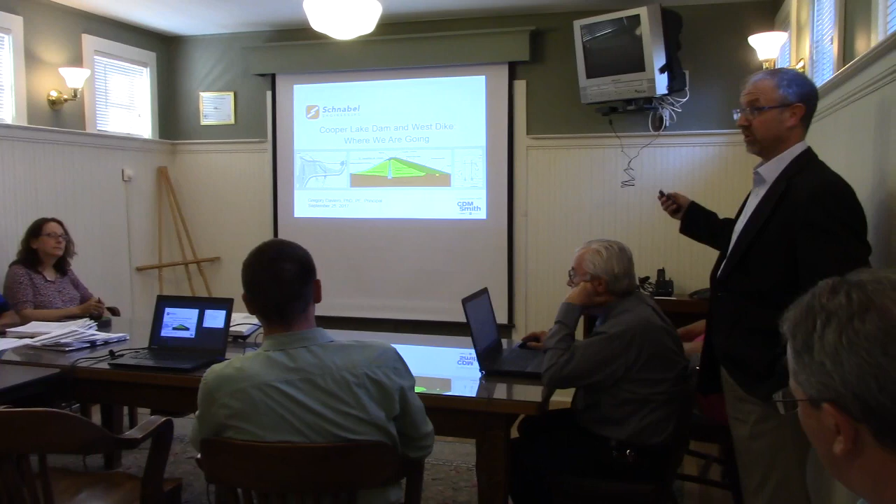Hi, thanks for everybody coming. I'm here to chat about really nothing new in this presentation. It's really an update to try to come to a decision point on how to move forward at the dam. So what I'm going to be talking about today are the drivers as to why we need to do this project. Then there are a few options, one calling the baseline project. There are two potential projects to raise the dam. And then we have a formal recommendation, and then a little bit of discussion about how to move forward.

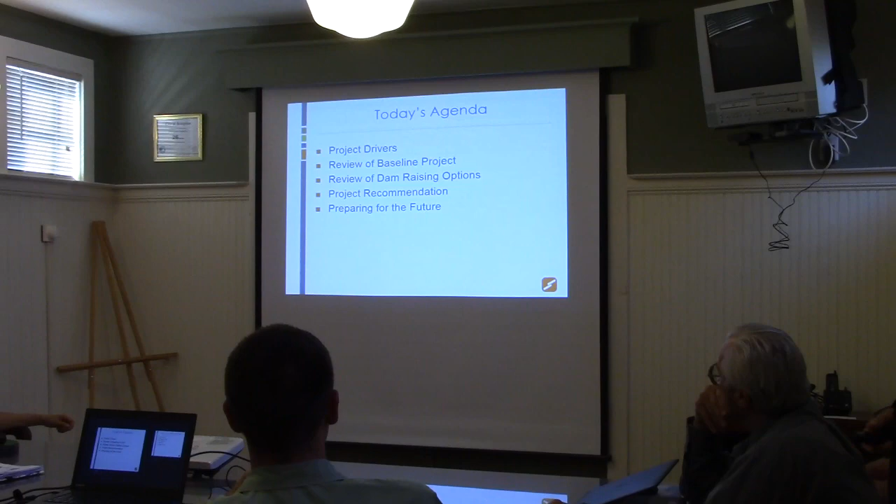So I said there's nothing new. What you're going to see here are slides that have already been presented in some way or another to the board and in other public meetings through August. My first presentation, I guess, was August 2012. My latest was January of 2016. And really, each time there was just a progression of work. We learned more, we refined the recommendation, until finally, in the April timeframe, we were pretty much where we are today, just stewing over what to do.

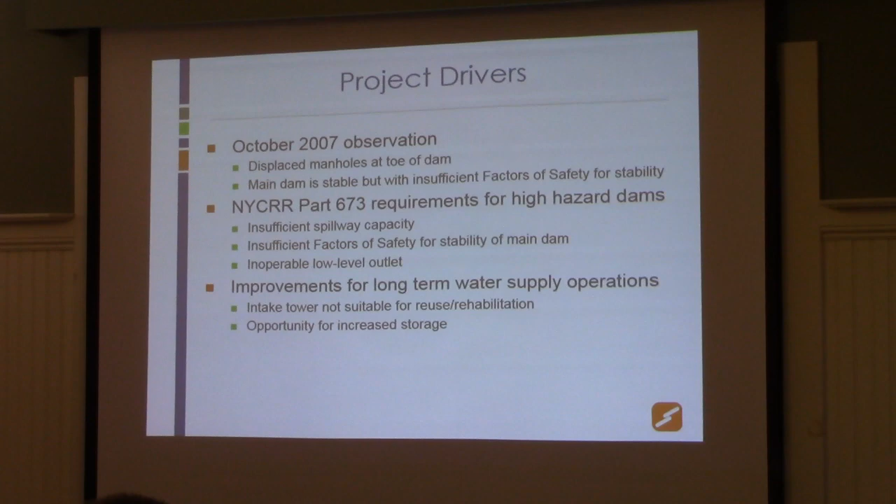So why are we here? Back in 2007, there was an observation at the toe of the dam where there was a manhole. A valve was going to be replaced, the manhole was pulled, and the top of the manhole was slightly shifted, which caused some concern because the manhole was at the toe of the dam. So there was some initial evaluations and site visits and calculations done, and it was determined that the dam was stable, but it didn't meet the factors of safety that are recommended by New York State and the Army Corps of Engineers.

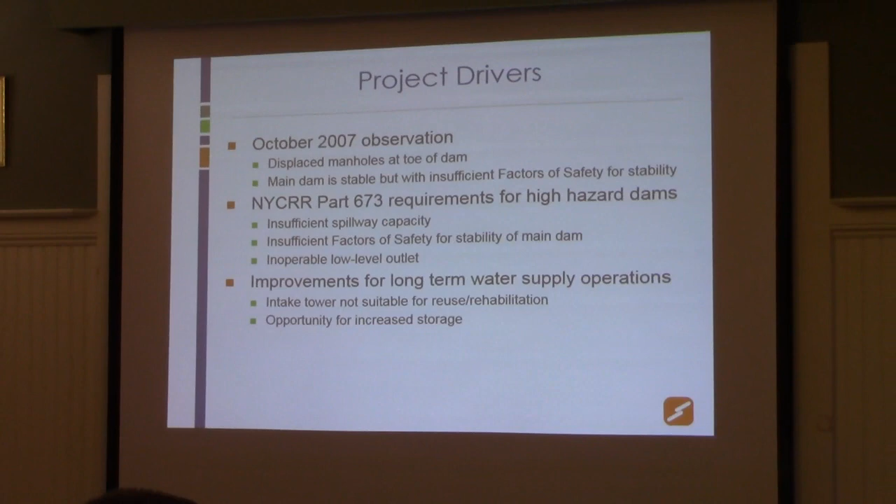Two years later, the state of New York passed new dam safety laws, specifically targeting owners of dams that are high hazard or significant hazard. This is a high hazard dam. What a high hazard dam is, is one where it's imagined if the dam were to fail, regardless of the dam's condition—it could be brand new or it could be very old and decrepit—does anyone die? Is anyone likely to die? So the answer here is yes, people are likely to die. There's communities downstream. It's a high hazard dam.

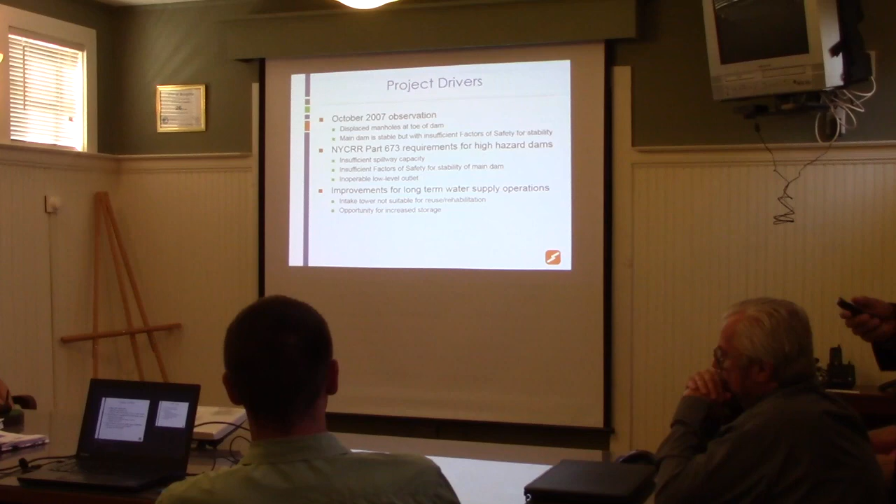As an owner of a high hazard dam, the new law requires you to perform an engineering assessment of the dam, which essentially has you look at three different things. Is the spillway of the dam sufficiently large enough to pass the probable maximum flood? An enormous storm, Noah's Ark type storm.

In years past, no one could comprehend what that meant when I stood in these presentations. Now people understand—Irma. When Irma arrives in Kingston, our spillway has to be capable of passing it so the dam doesn't overtop and fail. So that might not be an exact comparison, but you get the idea.

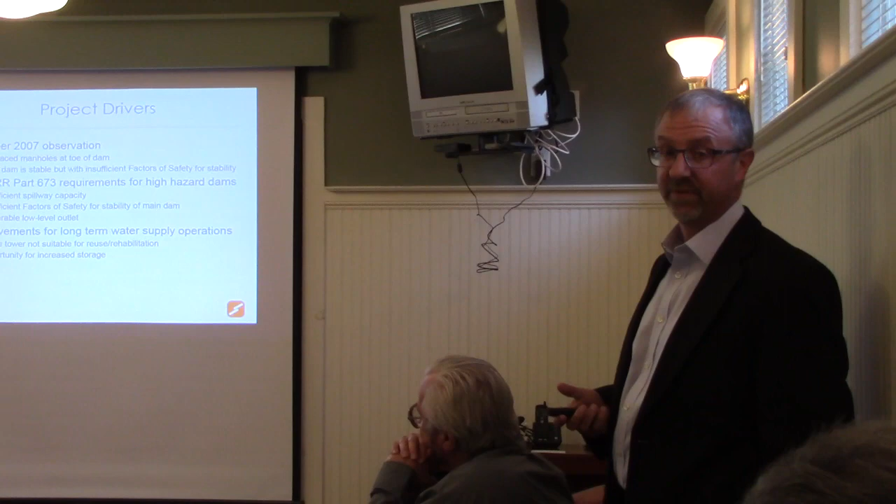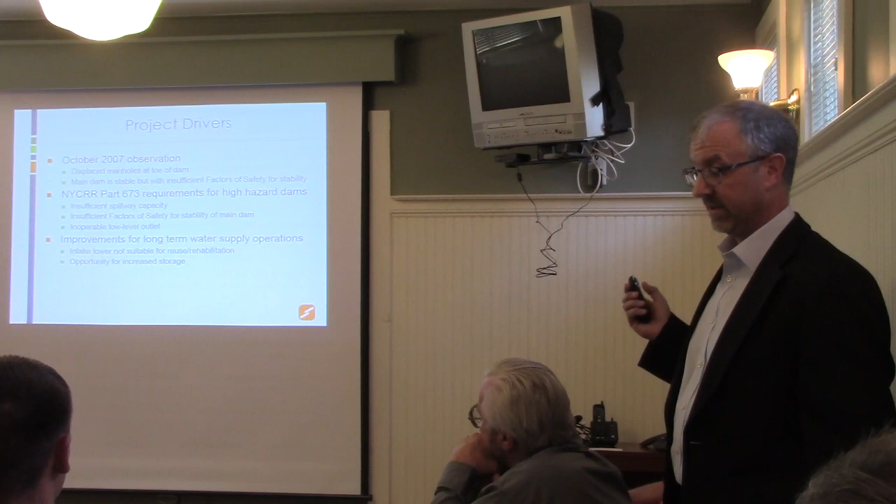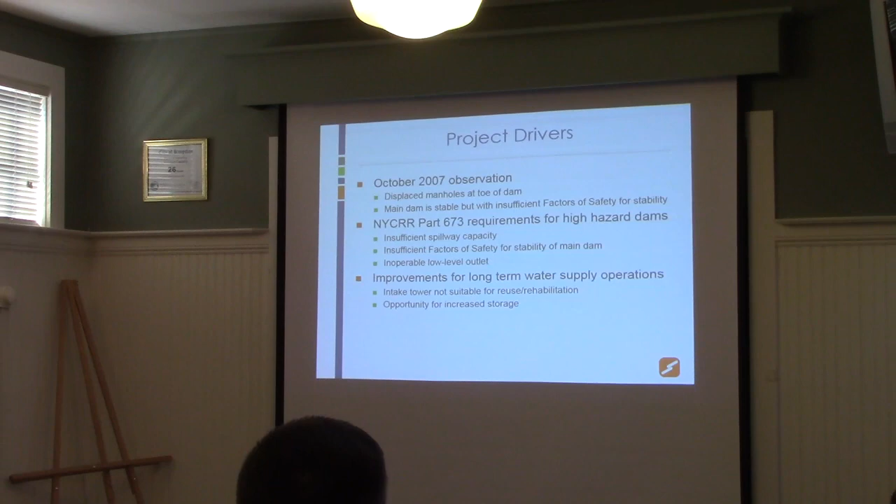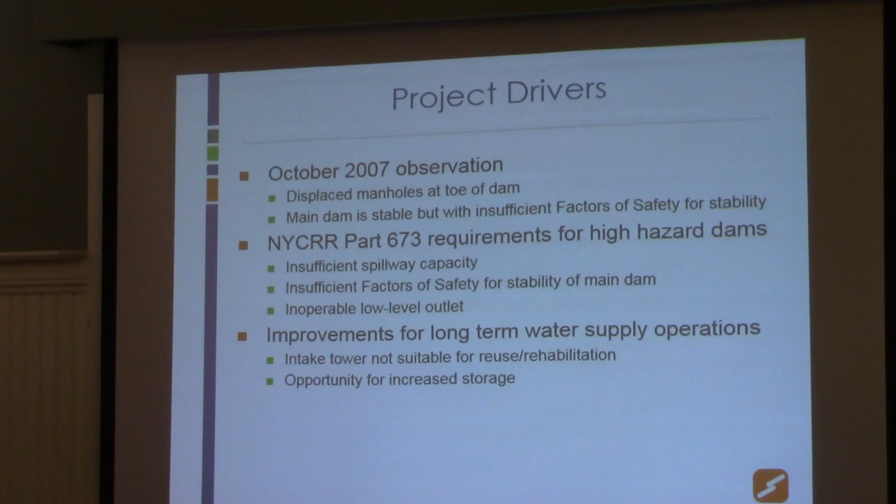The other thing that has to happen is you have to have stability, factors of safety for stability on the dam, meaning that the dam isn't going to slide or overturn and isn't going to fail in the event of an earthquake. And the last thing you need to evaluate is whether you have an outlet that is capable of draining the dam should there be a pending emergency. If there's something happening and your options are drain the dam or let the dam fail, you're going to drain the water out to the extent possible. In this case, you have insufficient spillway capacity, you have insufficient factors of safety, and you have no operable low-level outlet.

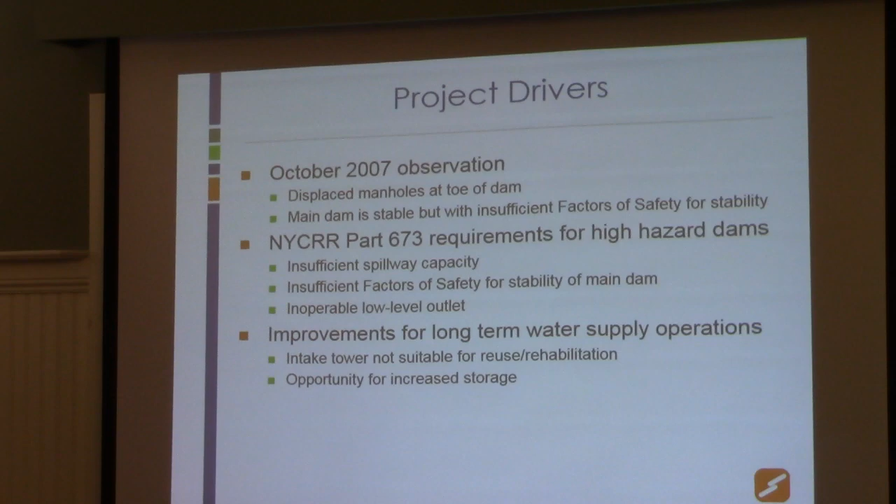There needs to be work done and improvements made. One of the things we looked at early on is whether we could utilize the existing intake tower, where water is taken out of the reservoir and delivered to the water system. It was an original structure built on top of as the dam was raised in the past, so it was reutilized. We did investigations and determined it's not usable, so you're going to have to put in a new intake tower and new inlet piping to maintain functionality of the reservoir. We also discussed, since we have to do all this work, is this not a good time to prepare for the future and build more storage into the reservoir?

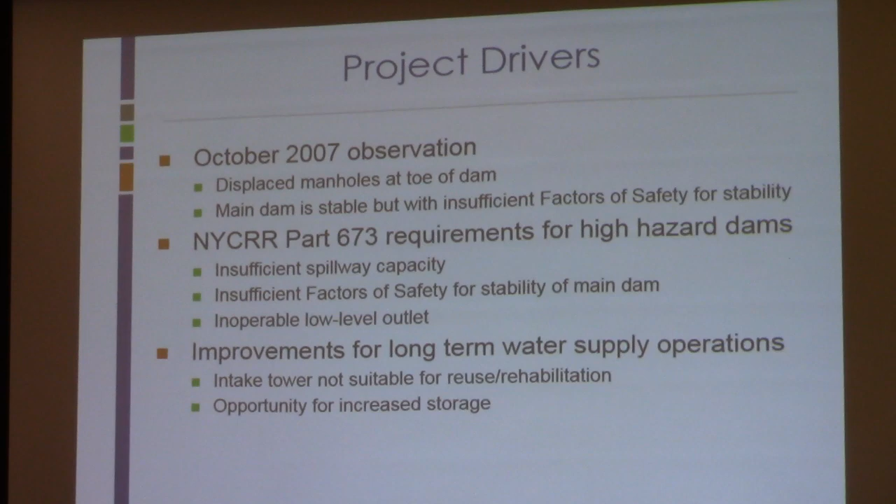Those are the project drivers. I'm going to talk about three different projects.

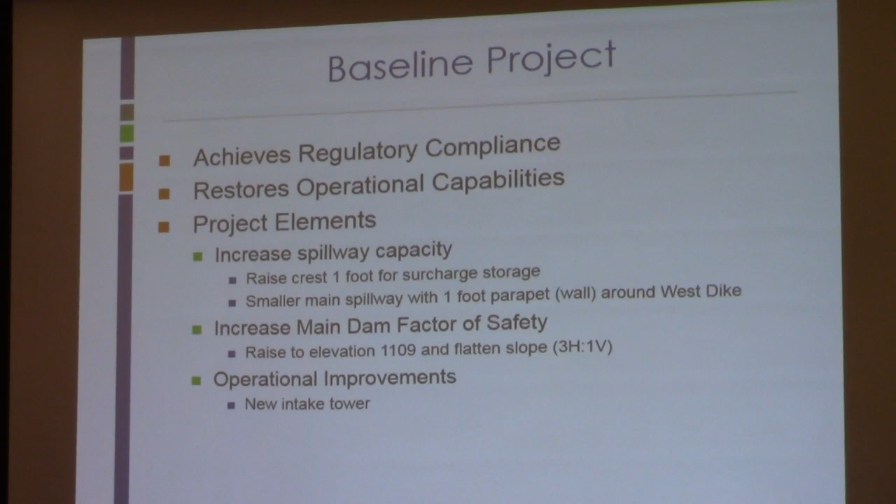Before you proceed, when you talk about a pending disaster causing dam failure such as a storm, I think the board should be made aware that the intake to that reservoir is not by means of a stream or river, which during an emergency usually overflows, causing a reservoir to overflow. This reservoir is filled by a pipe from a stream some distance away, and in an emergency, that pipe could always be closed so additional storm water wouldn't come in other than normal rainwater. Am I correct, Greg?

Couldn't have said it better. That is exactly right. This is unique in that the river doesn't flow into the reservoir like a traditional setup, such as in California, such as Oroville, where there's uncontrolled inflow during a storm. Here you can shut the inflow off.

That being said, there is a small watershed, and there's a significant amount of water that would fall directly on top of the reservoir. So while you could shut it off, it still doesn't have the spillway capacity it's supposed to have. It's not nearly as dramatic, and the volume of water that would overtop wouldn't be sustained for hours and hours or days and days. It would be a quick event, but possibly consequential, so it still needs to be addressed.

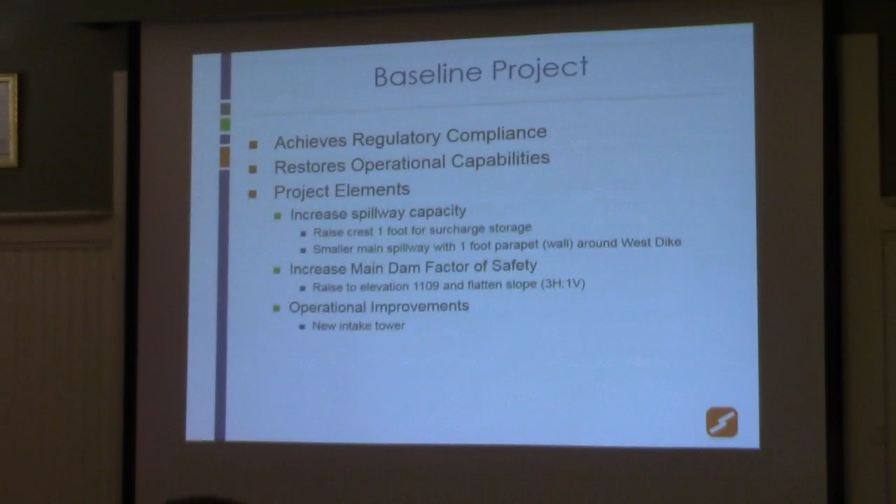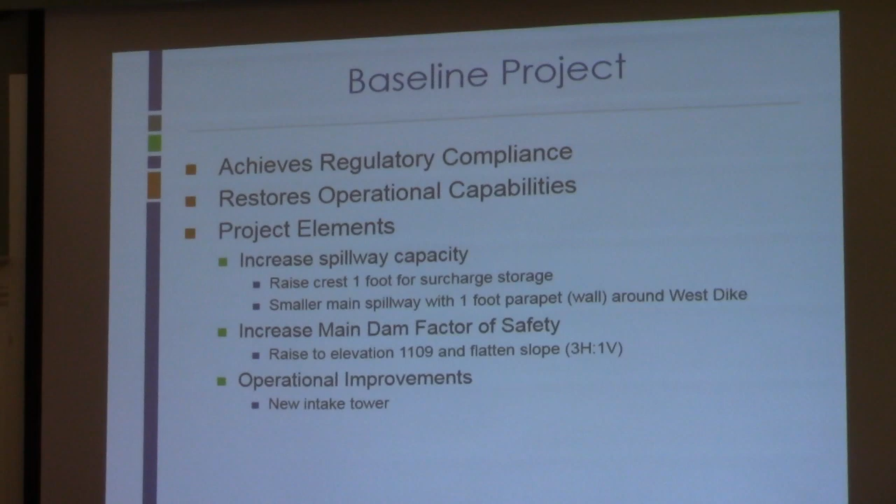In addition to raising the dam to elevation 1109 from its current 1108, we're going to flatten the slope. It's about 2-on-1, 2.5-on-1 now, and we're going to make it 3-on-1, which is recommended and is something you could drive a mower on to mow the grass. What's there now is too steep, almost too steep to walk on. It's very difficult to inspect, hard to see what's going on, covered with steep rock, and a challenge to maintain.

Finally, there'll be a new intake tower so you'll have more operational flexibility to operate your water system.

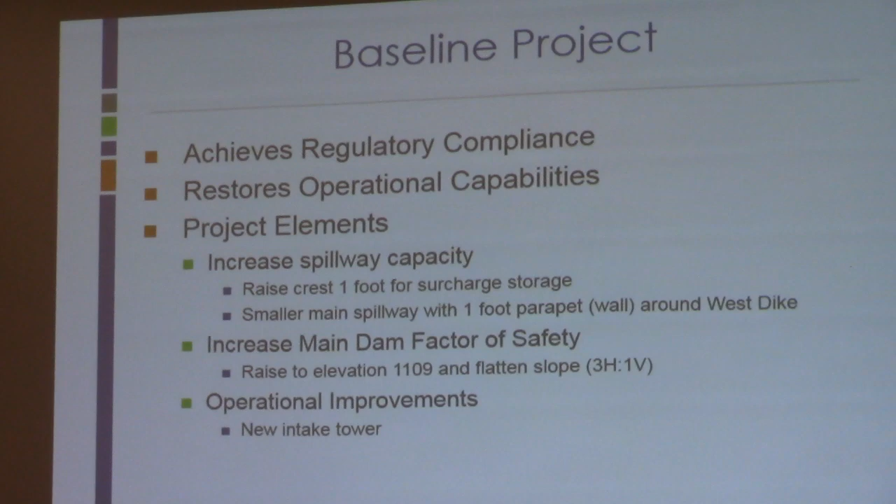The new intake tower, which you'll see on the plan in a minute, is located south of where the existing one is. There will be three new inlet pipes dropped into the reservoir, and you'll be able to remove water from the reservoir at different elevations, giving you the ability to choose the water with the best quality for the time of year.

It's a closed chamber, meaning when you look down into it, it'll be empty—there'll be pipes in there, but it won't be full of water. The existing chamber is full of water, so if you want to work in that chamber, you have to work underwater. This new one will be a closed system. All the existing piping that's there now will be grouted. One of the biggest challenges with old dams is that they have a lot of pipes running through them, and each one represents a risk for water to move through or around.

When possible, we try to grout these things and find an alternative way to deal with whatever function they were providing. So we'll be grouting all of the existing outlet piping. The particular things that will be new: there'll be a new building, new inlet piping, new outlet piping, new valves, and a new metering chamber, all things that will improve your operations.

The valves in particular is something we propose that hasn't been done previously. You put 2 valves in series, and the reason you put 2 in series is because you want to be able to prove that you can drain the reservoir. So the way you do that is you close one and open the other, you see that it opens.

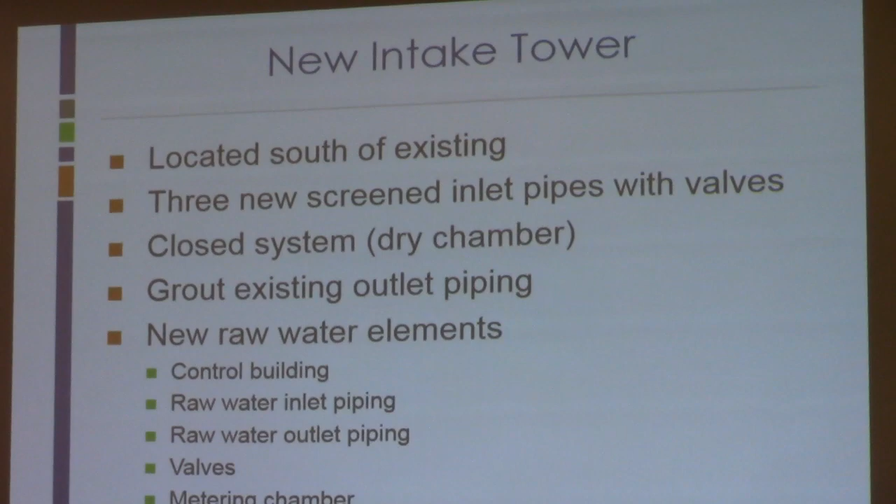And you're comfortable, you close it, you open the first, and you've not let any water out. Historically, people have put in 1 valve because it's a little cheaper, and 10 years goes by and they say, if I open this, can I close it? Usually the answer is not worth the risk. Then 20 years goes by, and in some cases, I don't know when the last one was open, but I've been here 36 years and I don't remember it being open. For that very reason, by putting in a pair of valves, we can address that.

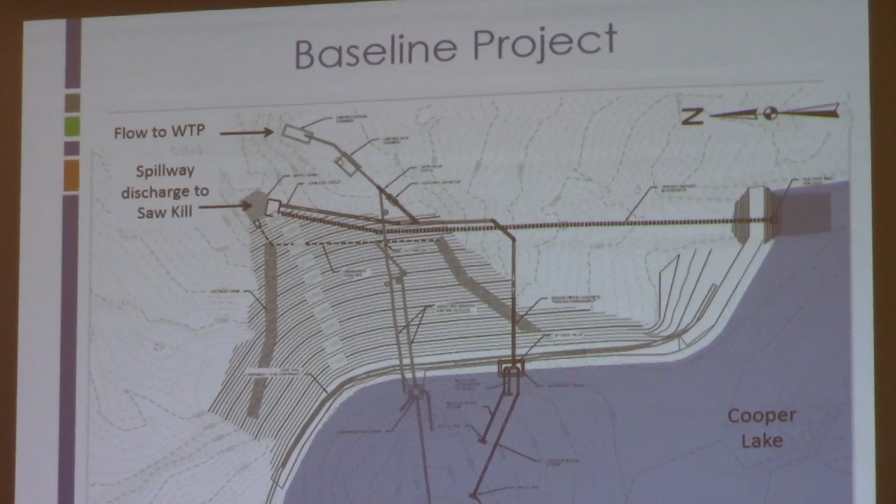So this is a plan view of the lake and the dam, kind of an engineering look. I apologize for that, but what you're seeing in the blue is the lake. This area is the existing intake structure. It has 3 inlets. These are the existing pipes to the dam. This is all going to be abandoned and filled with grout.

We're going to build a new tower here. We're going to put in 3 new intakes. We're going to extend the piping. The part you see with these parallel lines is new material being put in. That's just the contours, the flattened slope. So this will spatially show you the area that will be impacted by the project, basically by flattening the slope. We're going to go through that and discharge into the existing water supply structure.

The existing spillway, which is over here, is going to be replaced by a drop inlet spillway. There'll be a small additional structure built here to block it off, and it'll be discharged through a pipe to where it discharges now to the outlet. That's the baseline project.

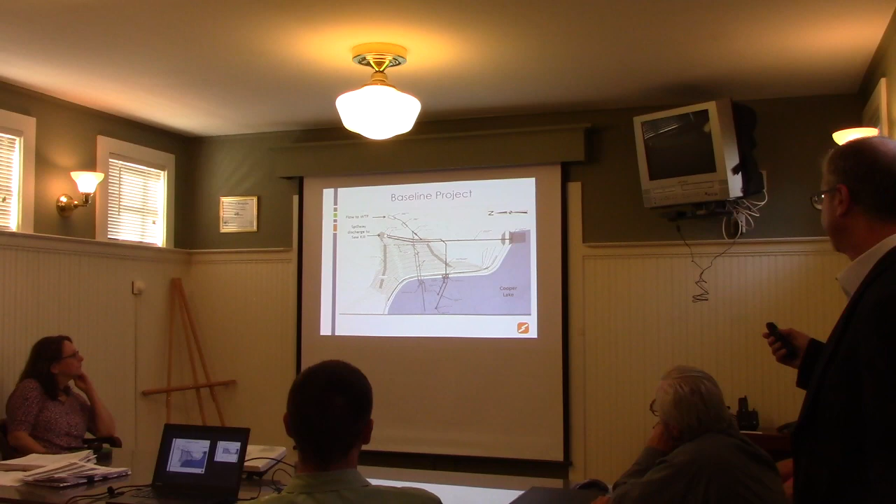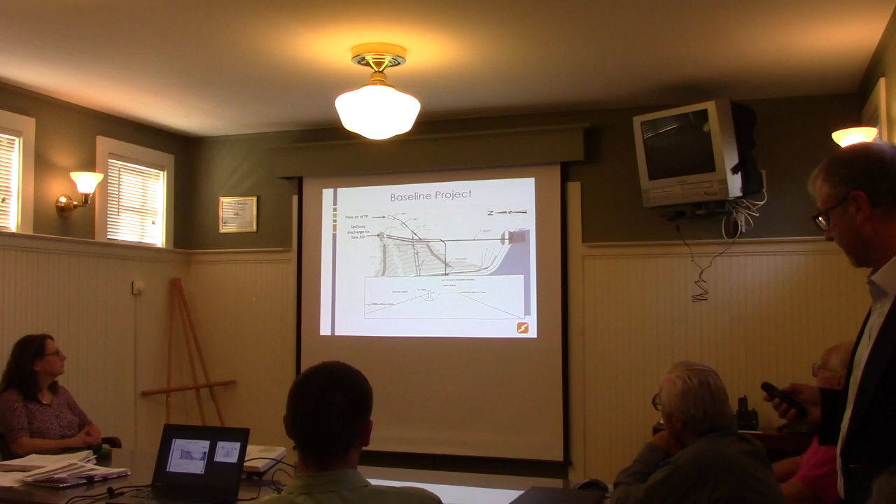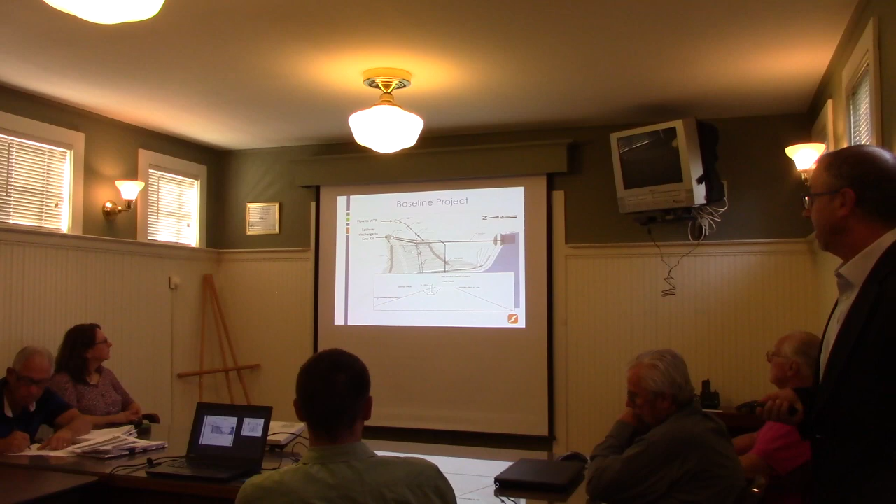On the west dike, I haven't mentioned that. If you're not intimately familiar, there's the main dam, which we're looking at. The west dike is on the other side of the reservoir. It's significantly longer, not as tall, but its length makes it challenging to deal with. Because we're going to increase the height of the west dike as well to take advantage of the storage, we're proposing to put in what is basically a curb, a little T-wall that will run along the top of the dike to provide a little more storage for that very extreme event.

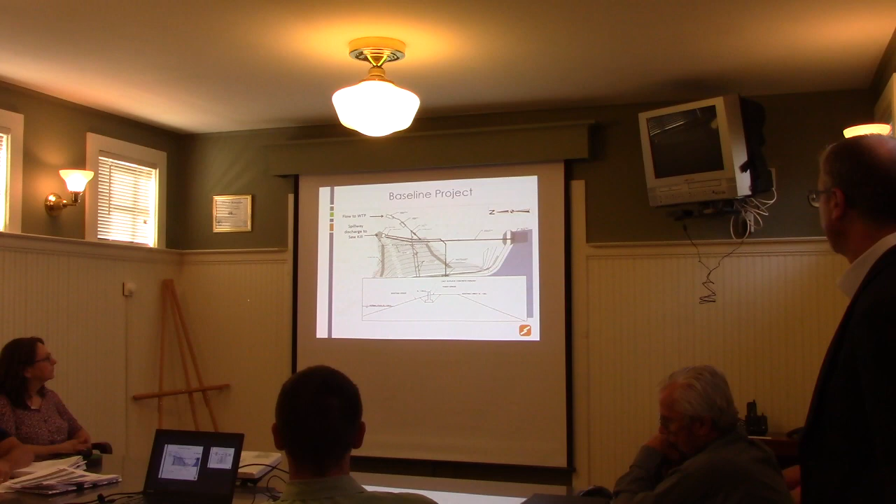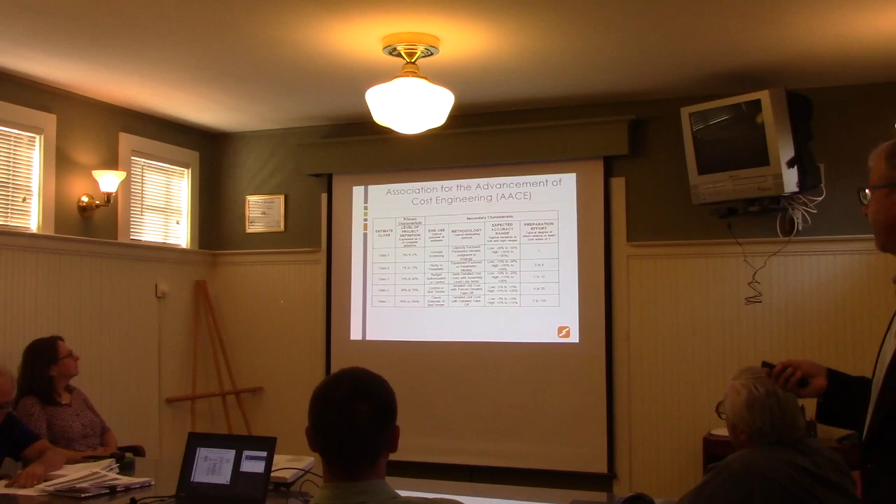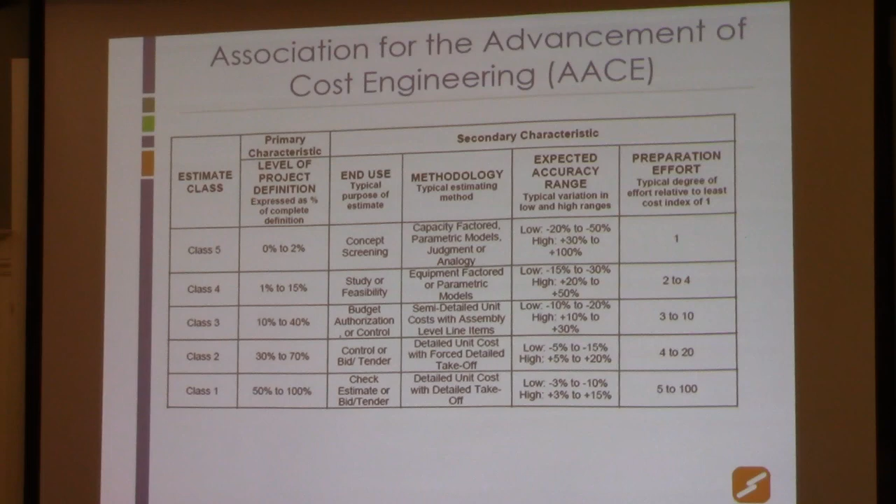So we prepared cost estimates based on an Association for Advancement of Cost Engineering standard. We're at about class 4, meaning the project is 1 to 15% done, and to me that means there's 85% of it we don't know yet. We've done our best to tell you what the cost is based on what we understand now, but as we refine the project, the costs will become more clear. We've made assumptions that we think are conservative estimates, so while the cost could go up, we're hoping that it comes down. These are class 4 estimates, meaning we might be 15 to 30% low, or the price might be 20 to 50% higher than what I'm talking about today.

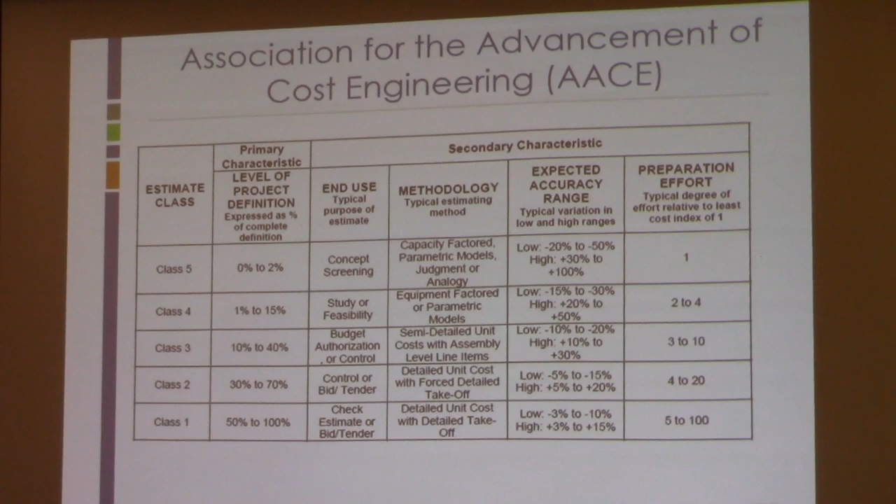For the baseline project, it's a $4.7 million project, broken up into 3 components: the main dam, which is the flattening of the slope that addresses the factors of safety; the spillway, which is the piping and the raising of the west dike with the parapet wall; and the outlet and intake works, which is the piping, building, and valving for the water system modifications. So it's a $4.7 million project.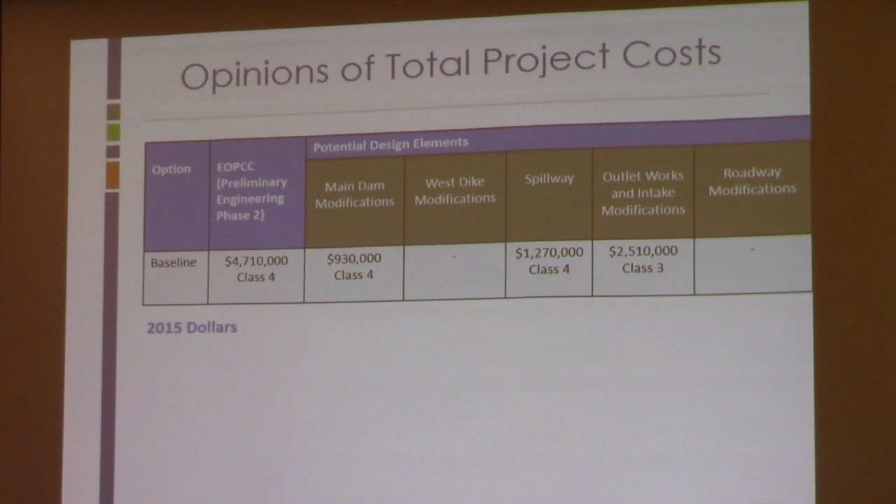When we prepared these estimates, it was 2015, so there may be some escalation that you might want to consider as well. We haven't done that. Like I said, we're just representing things that were already done.

So we looked at two other things. What if we're going to be working on the dam and bringing in all this material, might we raise it? 5 feet was the most that we could raise it without affecting Route 212, which is on the west side of the dam.

The 2.5 elevation raise is really just halfway. There's no real reason we picked 2.5, just to see if it was a linear cost differential or if there was some point of inflection where you might get more value for the increase than you might otherwise.

So raising the dam 2.5 feet would give you 29.2 more days of water supply during the worst drought you've ever experienced—so that's another month. Raising the dam 5 feet would give you 60 days. One's approximately double the other.

The reservoir is pretty uniform in height, so that's really the benefit. The benefit is more water supply to manage droughts that may be longer as we look forward to the future, or maybe more water to have available for supporting economic development in the city or elsewhere.

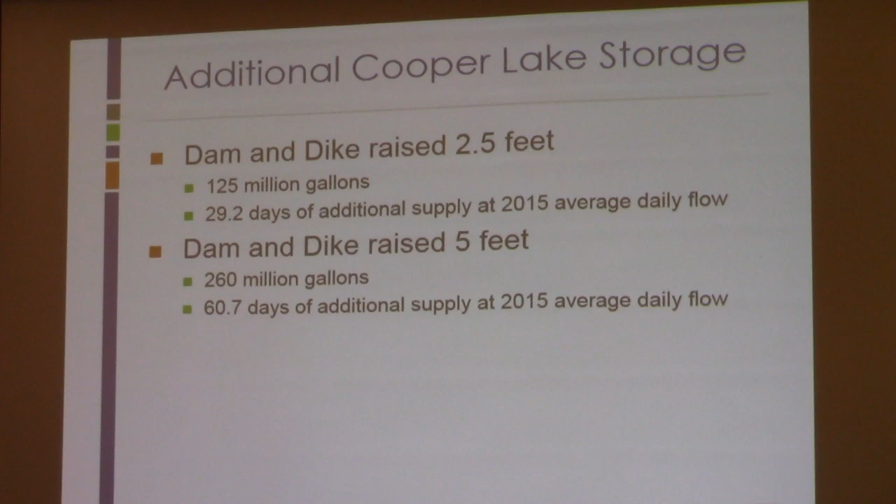So this is really just a brief explanation of how we might raise the dam. This is what our cost is based on. This is the main dam. The main dam has a concrete wall in the middle that you can't see.

The lime green color is the existing embankment. The brown is the existing foundation. So what we're going to be doing is placing all this darker green material on the dam, flattening it out, making it heavier, easier and more stable—easier to maintain, more stable. We're going to take this core wall and raise it. We'll put some riprap on the new upstream slope, and this would support a higher elevation.

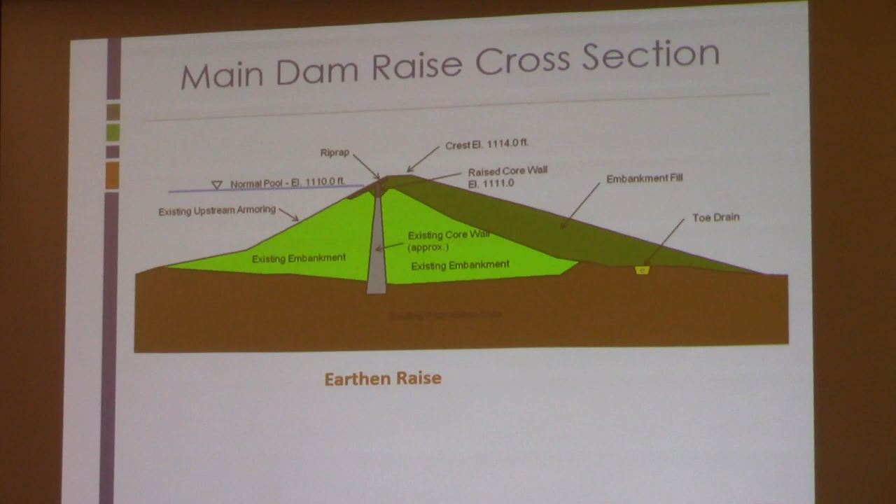The elevation of the water currently is 1105. So this represents a 5-foot raise to elevation 1114. There's a lot of material there—that's a lot of, not information, but a lot of physical earth, dirt being brought in to do this project.

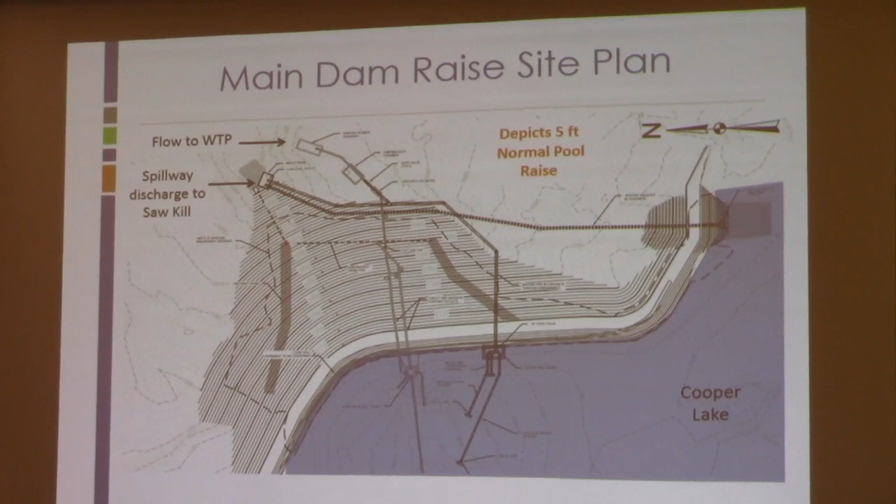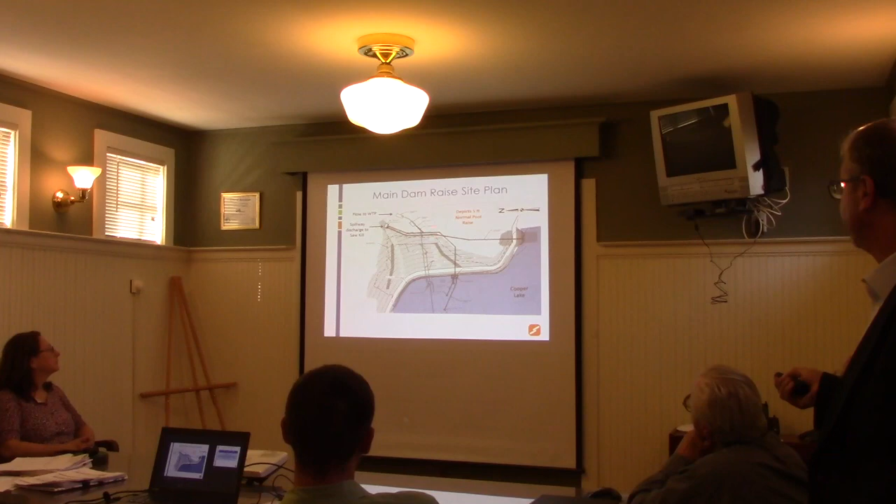So you might ask what's different about this. If I showed you quickly, you'd notice—this is the footprint of the main dam raised. The only difference is this dashed line, the extent of the footprint from the baseline. Because we're raising it 5 more feet, we're extending 15 more feet everywhere. It's a 3-on-1 slope. The piping is essentially the same, the spillway essentially the same—it's really just more material than the baseline.

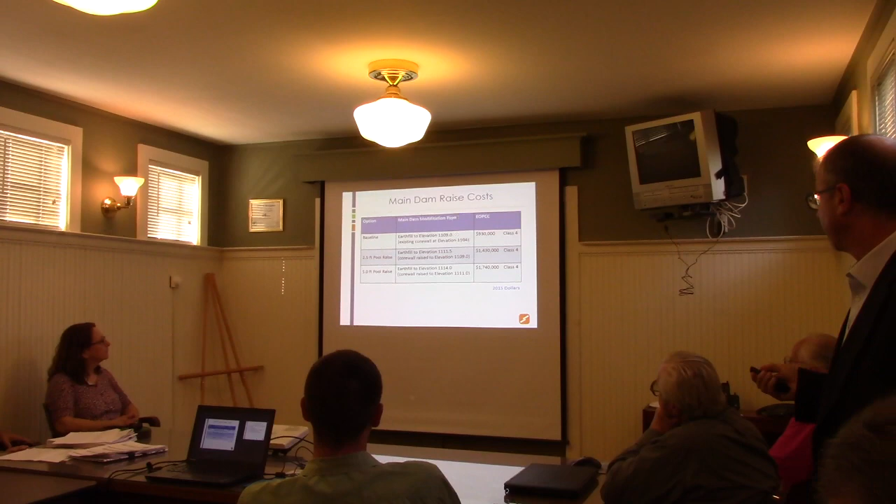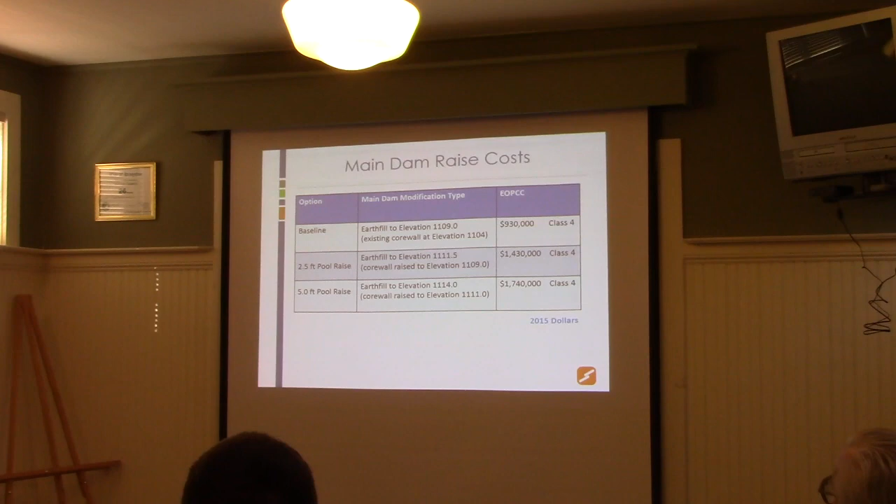So we looked at how much it would cost to raise it 2.5 feet or 5. A 2.5-foot raise we're estimating at 1.43 million. A 5-foot raise, 1.7 million. The only difference is the volume of material being brought in and a little bit of extra piping.

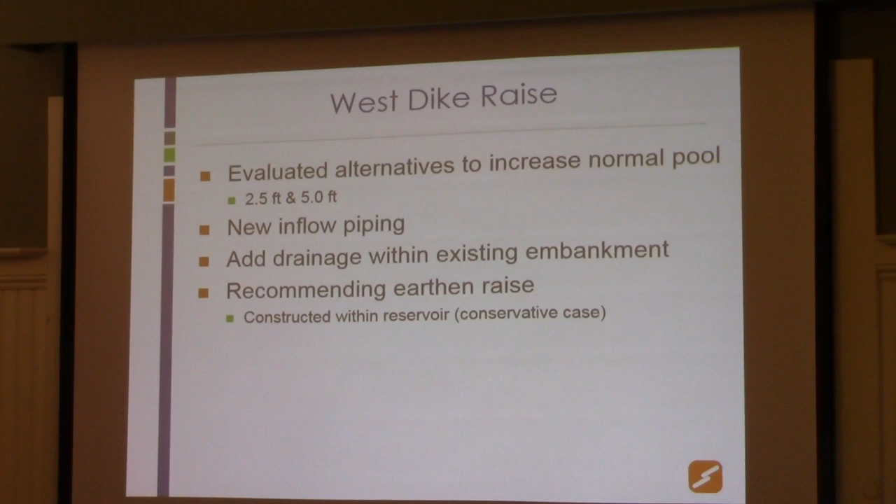More consequential to the raising and creating new water supply storage is the west dike. So we also looked at raising the west dike 2.5 feet or 5 feet. There's some inflow piping, the piping Bill referred to earlier, that carries the water from the main hollow and goes under the existing dike. If we are to do work on the dike, we're going to be replacing that piping because, same reason, it's opportunistic—we're there, we're going to replace it and make it support what we're building new.

The west dike, as it stands now, can support the baseline condition—there are no problems. It cannot support an increase in water surface, and it needs repairs beyond the baseline condition if it's to support a higher normal pool elevation. And with that, in addition to the additional material to raise it, there are some other things that need to happen to make it safe.

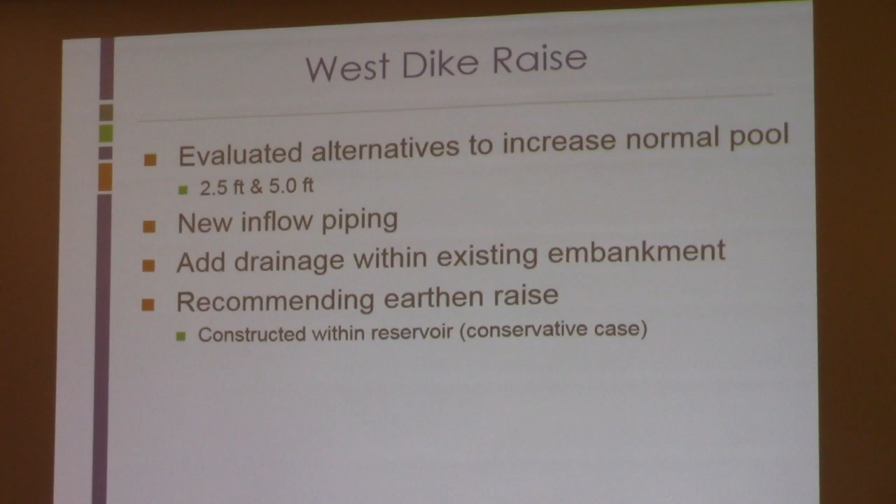So this is a cross-section of the west dike. Notice it doesn't have that concrete core wall, though it's much flatter than the main dam. So what we're going to be doing is putting some drainage in to keep the water levels down, a new toe drain, and replacing some of the materials. We've done explorations there—the materials are suitable for their existing use, but not suitable to support a higher water surface elevation.

And we would then raise the dam—this is inside the pool—we would fill on the inside of the pool to raise the dam rather than on the outside. So without increasing the footprint outward, we're increasing the footprint inward. And I'll show you what that means on the next slide.

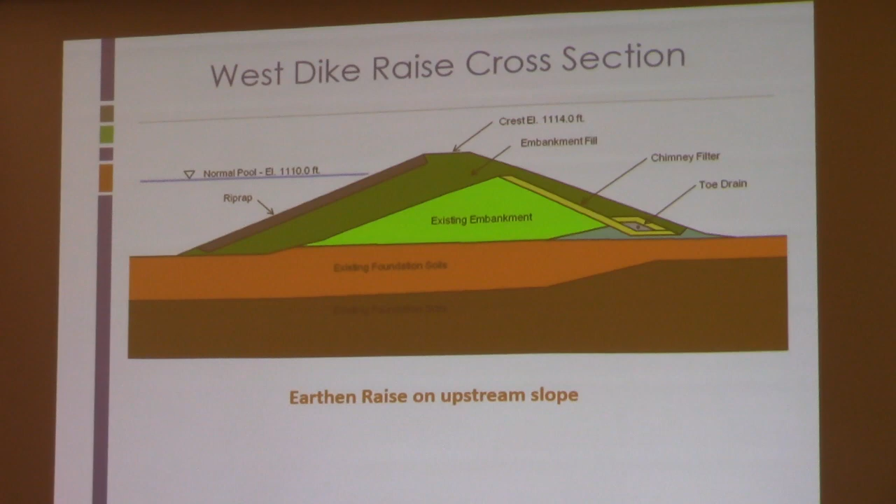A 2.5 foot pool raise is a $2.2 million project on the west dike alone. A 5 foot pool raise is a $3.3 million project. The improvements that need to be made are consistent between the two, so once those improvements are made, the incremental cost between 2.5 and 5 feet is just the extra material needed.

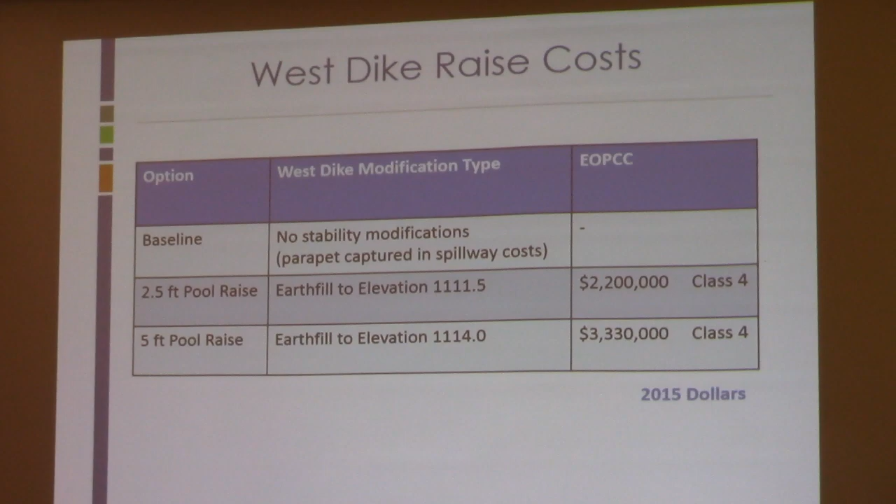Greg asked about the baseline, where the earlier slide showed the concrete T-wall. You don't have a cost associated with that. If you let me go to the next slide, I think I can answer your question. If I don't answer it in the next couple slides, remind me, because it'll be clearer.

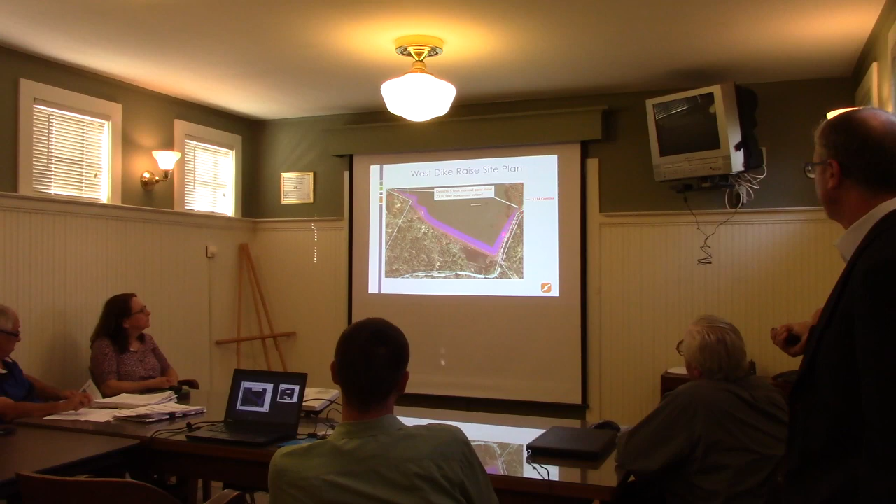So this is the west dike. The west dike is very long, it runs along here on the opposite side. It's about 2,200 feet long, which is significantly longer than the dam. The dam is about 550 feet, so it's 4 times longer.

What we're seeing, this line here is where we would put that wall, that parapet wall. The purple is where we would fill into the reservoir to raise the dam, or raise the west dike. The area downstream is where we would have to do some work at the toe to remove some softer materials.

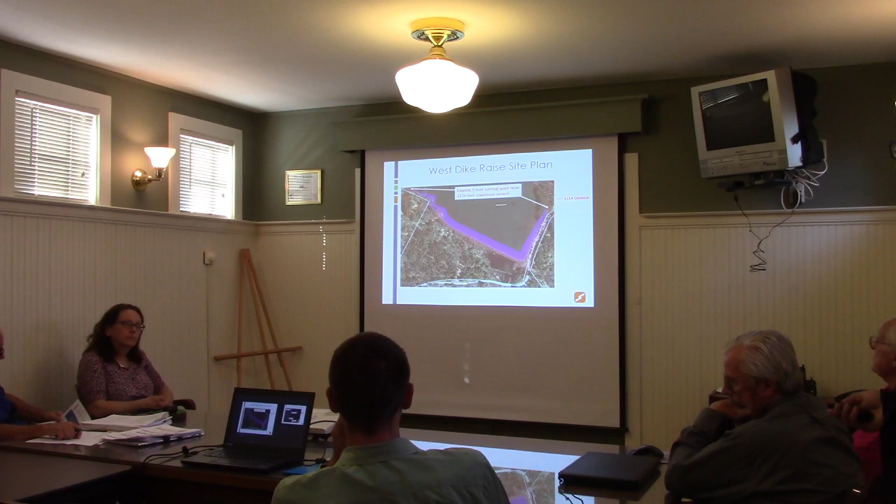So this is spatially a much larger area, there's much more fill to be approached. It's simpler construction in that you could lower the pool and access a lot of this stuff pretty easily, almost within your normal operation, but there's still a lot of materials to be dealt with.

Farther out, for those who aren't clear on the full setting, here's the west dike. This was the 2,200 feet shown on the last slide. The main dam is here. There's the main dam.

So you can see in terms of the magnitude, the length of the project, the area of impact, the west dike is greater, although most of the impact is on the reservoir side of the dike, not on the downstream side.

One of the things we were concerned about when we raised the pool, more importantly, is that during extreme storm events, the water surface is going to be raising above that and into areas that haven't currently seen water. So there are some roadways along the outside of the reservoir here, here and here, that in order to keep them dry for all events, would need to be raised.

So there's an additional cost for the roadway work. This is one of those nuances of the project that become important. Currently, under some flood events, those roadways would flood.

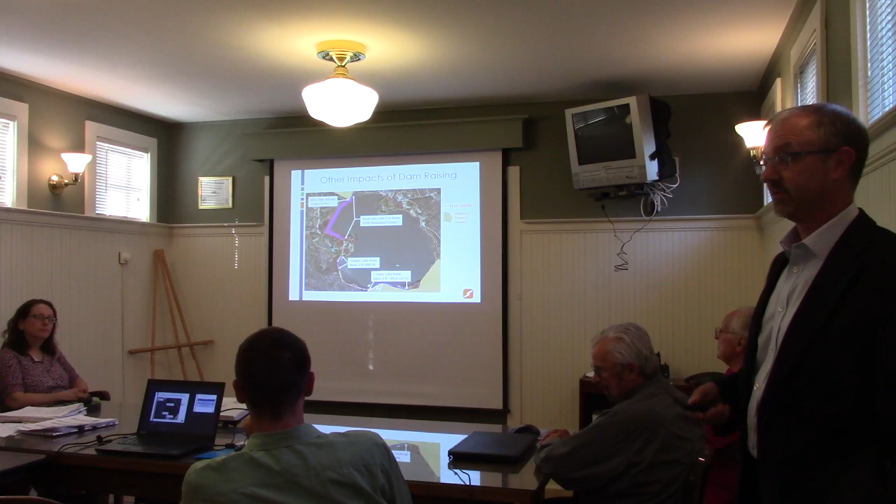As we started to digest this since it was developed, we wonder whether that's money well spent. I don't know if it is or not. I just know it's a lot of money to raise roads that currently flood, to a level that still may never flood. I'll show you what those costs are in a minute.

So to raise it 2.5 feet, we only need to address this portion of the road. To raise it 5 feet, we need to address this portion and this portion. So it's $460,000 to support a 2.5 foot raise in pool elevation, and $850,000 to support a 5 foot raise.

A lot of details, a lot of numbers. I'm seeing a question, I'm not sure who it's from, and I'm not sure if you want me to address it or wait. So I'm going to just continue, hopefully I'll get to your answer in the course of the presentation.

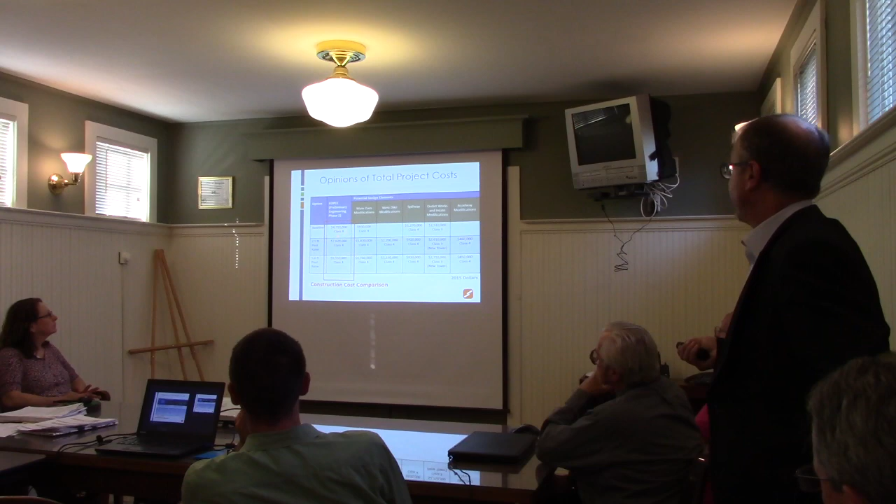This is really the summary of everything in terms of dollars and options. The baseline project, we talked about that, $4.7 million, addresses the main dam, the spillway, and the outlet works. So Dennis, your question was, how come there's no money in the West Dike for the baseline? I think that was your question.

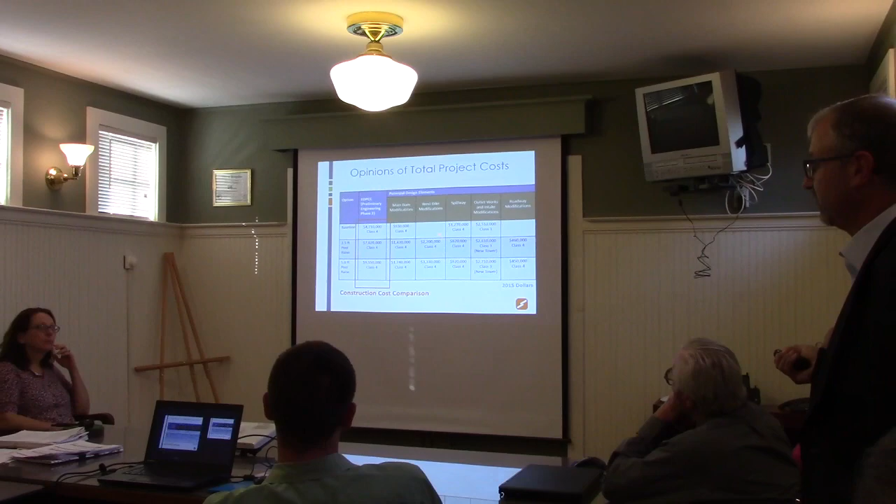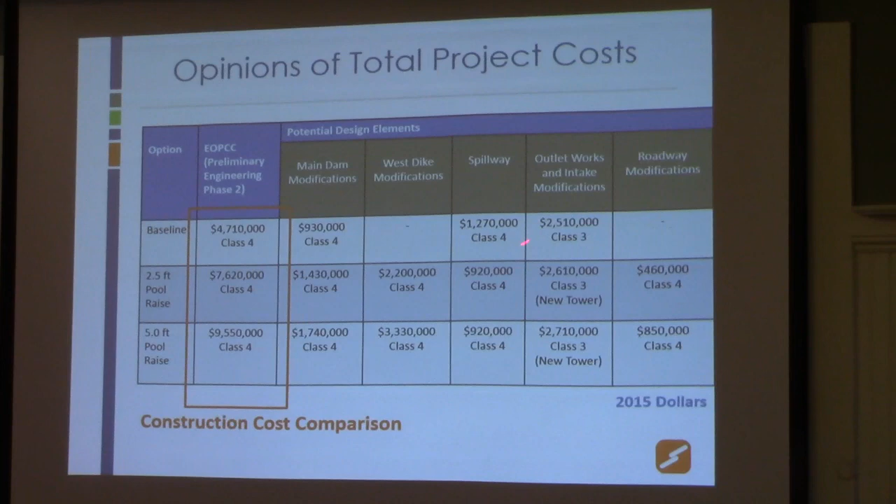In the spillway option, because we're putting in the parapet wall, it's really to address a spillway condition. So you'll see this number is larger for the baseline, and that's because it's capturing the concrete wall. That concrete wall is essentially $270,000 and $80,000, so $350,000.

That was your question, I think. Yes.

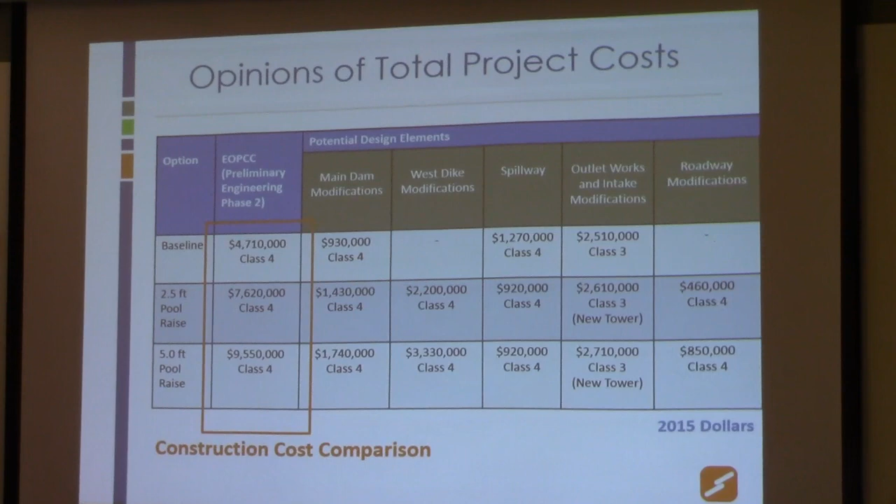If we were to raise the dam 2.5 feet, it would be a $7.6 million project. We would be raising the main dam, doing West Dike modifications.

We'd be addressing the new spillway, with a new tower that's incrementally more expensive than the original. We have to raise the tower by a foot, and we'd have roadway modifications. And if we were to do it with a 5 foot raise, all the same elements, all slightly more expensive.

This is really where we last stopped, and the question was posed: what do we do? So we've done some more work, a lot of head scratching, and a lot of grant chasing and funding chasing. It doesn't seem like there's going to be funds coming soon, ever—hard to know.

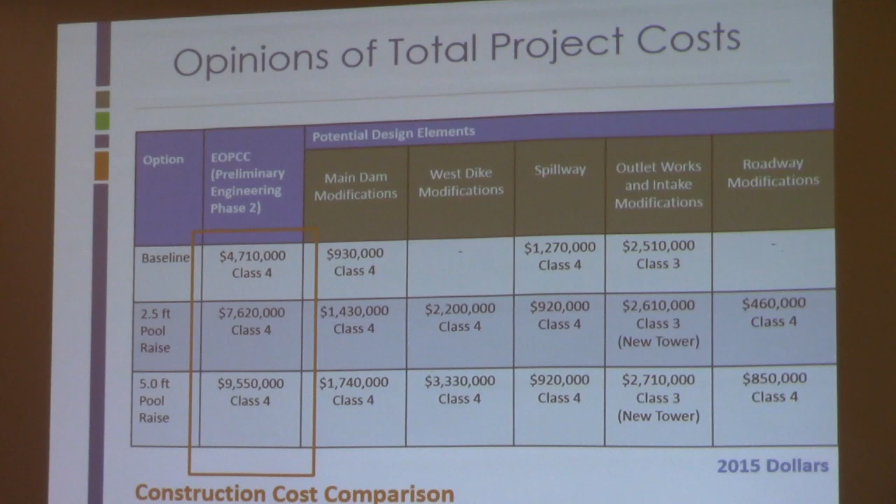But we still have a dam safety issue that needs to be addressed. So we had a recommendation, based on this premise: do what is necessary, but prepare for the future. What I call the future is having more water supply available if you were to need it. So what we're recommending is that we raise the dam 5 feet.

Because that's the most you could ever get out of the site, we're suggesting that while you're doing the work, you do it once. It's economy of scale—the longer you wait, the more it will cost. And there is the possibility that a future project could undo some of the things already done in terms of the new piping. So it's a reason to do it now.

Address the spillway capacity the way the baseline project suggests, and that is to put that parapet wall on the west dike. By putting the parapet wall on the west dike, we know the west dike in its current situation supports the current use. It's not a problem.

And finally, to build the outlet work chambers to support a 5-foot raise, which is kind of required if you're going to raise the dam 5 feet. So what this does is it addresses the factors of safety issue that we have, and it addresses the spillway stability issues that we have.

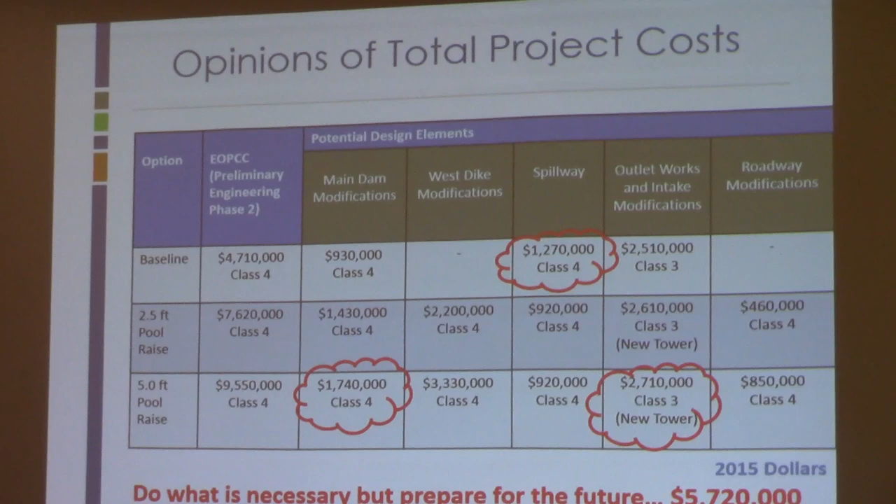So those three summed is a $5.7 million project. And the way I see it is you're spending 4.7 to address the needs and another $1 million to keep all your options open for the future.

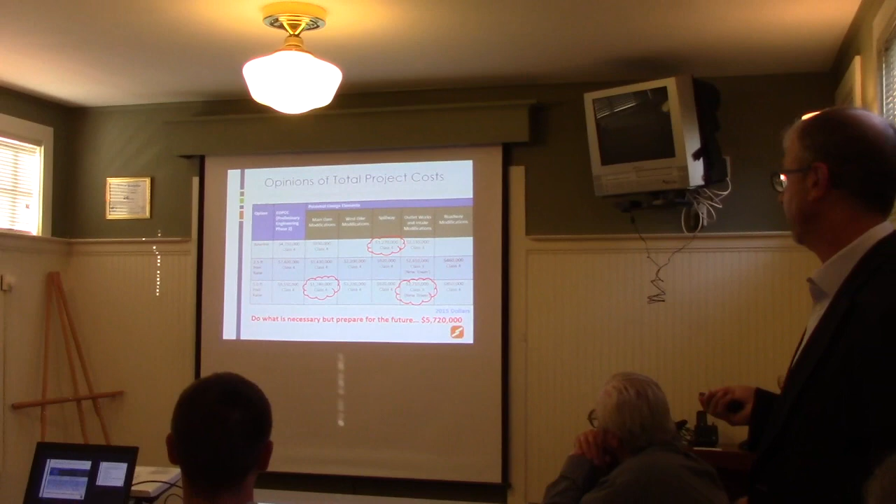So the recommendation is to move forward with the regulatory requirements without sacrificing potential future expansion. There'll be no pool raise, meaning the water surface is going to stay right where it is. There'll be a 5-foot raise of the main dam, a parapet wall on the west dike but no raise of the west dike, and a new intake tower.

In terms of the funding for the intake tower, there's a federal law—this is a long story, but I'll try to be quick. The Drinking Water State Revolving Loan Fund exists, funded through federal regulation, so that communities can use drinking water funds to do drinking water needs. For some reason, there is a specific exclusion in the federal law that says it can't be used for dams. We tested this exclusion, and it can't be used for dams.

It's also in the clean water revolving loan fund—same federal regulation. However, the intake tower and all the piping and valves in the building is something you need to do regardless of whether you are going to do any dam work. So that's really water supply work, and we believe the entire cost of that could be funded through the state revolving loan fund.

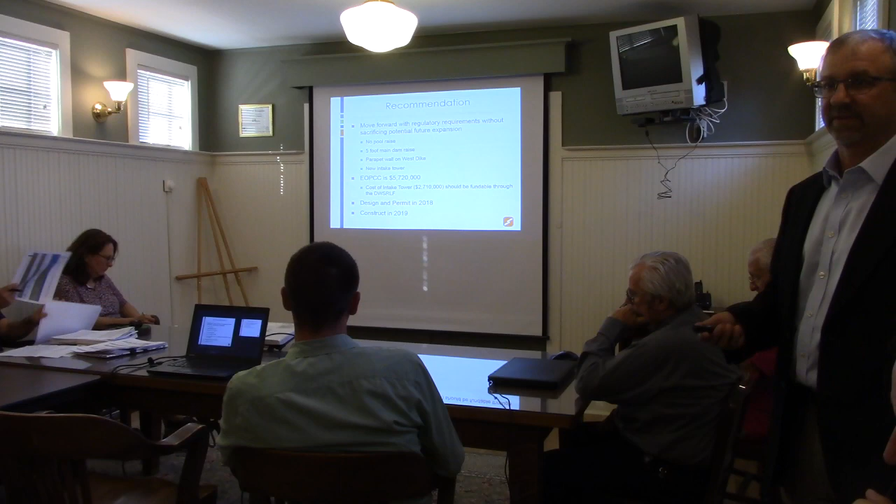So the project was officially initiated in 2007, ten years ago. DEC has been involved in some capacity along the way, doing annual inspections and checking in on how things were going, and reviewing the engineering assessments. We've met with them a few times, but they've more strongly stated that they would like to see a specific plan in terms of money being spent and the time frame for when this will be addressed.

That's what precipitated me being here today, to come to some conclusion. The message loud and clear was they want to see that schedule sooner rather than later.

So, a realistic schedule: what we're proposing is that in 2018 we would design these modifications in detail sufficient to give you an engineer's opinion of cost at bid, and sufficient to put out to bid and have a contractor construct the work. That work would then be constructed in 2019.

That's really the project. In terms of the future, or beyond that, or in parallel, it's really up in the air.

What we've seen is that when money becomes available, they want people to be prepared to spend it. That's the 'shovel ready' concept, you've probably heard that phrase. What that means is they want a design on the shelf and permitted, so that when the money comes you can go do it. They don't want a meeting to talk about scope, then nine months to design it and another year and a half to permit it. They want it ready.

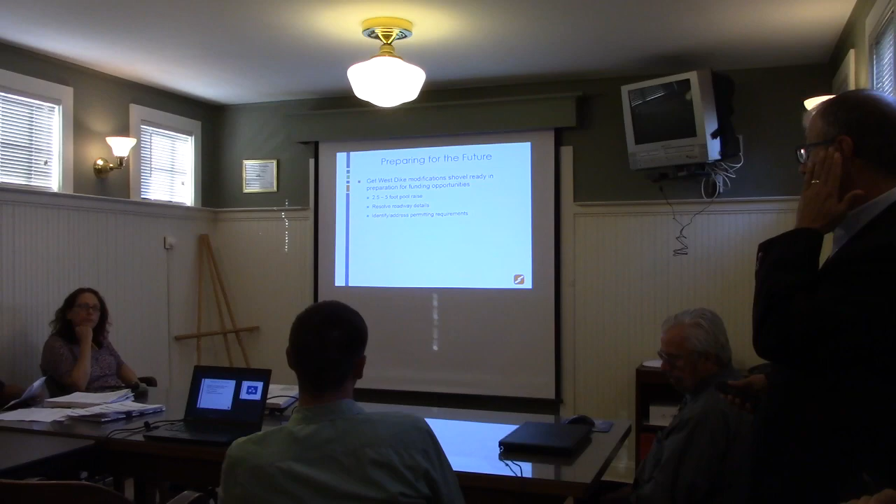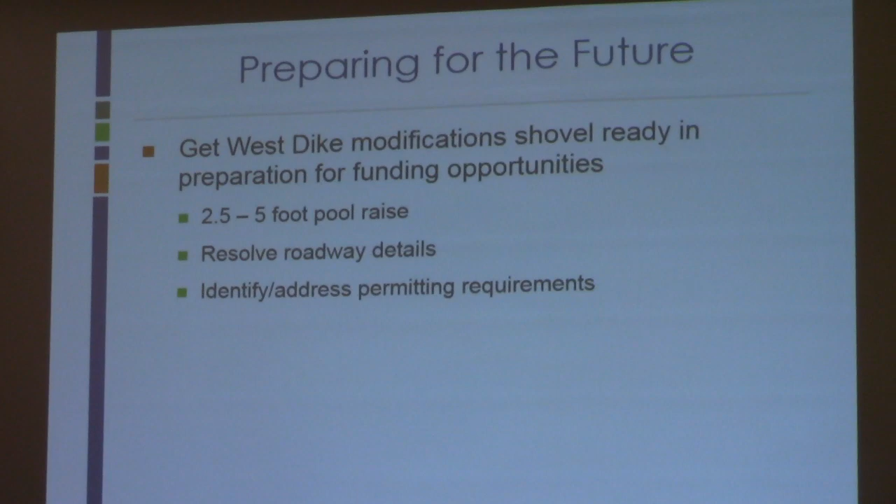While we're addressing the main dam, we can also be refining what to do at the West Dike. I don't think we have a really good answer yet. The flooding of the roadway, for example — how tolerable is that? Is it even necessary? Could we better demonstrate that you don't need to spend the money on the road, which might make that cost more palatable? Maybe with a bit more assessment we could figure out whether 2.5, 5, or maybe 3 feet is the right number in terms of how much more storage might be available.

So I didn't make it in 20 minutes. I'm going to say I had 20 minutes of questions, which isn't true, but I'm going to still say it just so I can say I did it in 20 minutes.

We would embark on a design process — that's all just part of the design work. One of the first things we'd do is some more site exploration to better understand the foundation conditions spatially, more than we know now. To date we've done explorations on the dam that established the baseline minimum extent of information to make an assessment, but as we go into design we need to identify, to the extent economics allow, the full extent of what's going to be required. So the first step would be further subsurface explorations to better define the soil conditions, and that requires us to contract with you to go to that next step.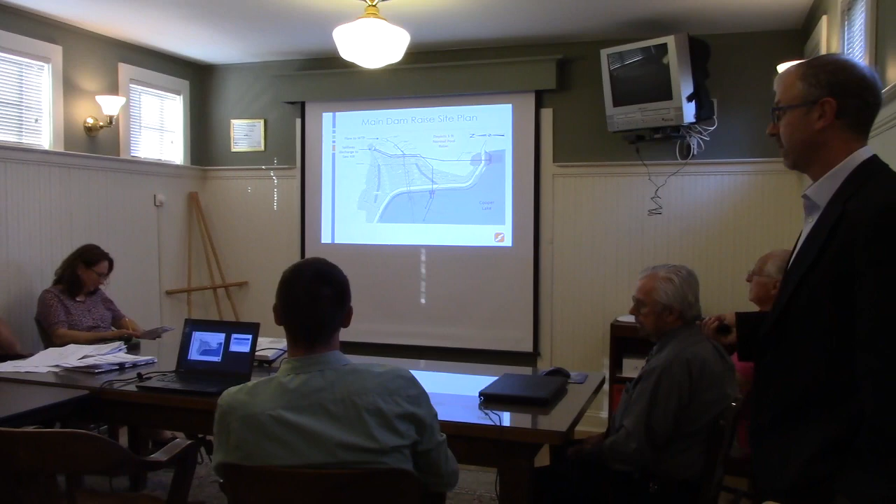Anybody else have any other questions? We're still talking just about Cooper Lake, so we're not looking at Reservoir 2 anymore? Yeah, this is the only thing we have to do — this was the only issue that was in front of DEC when we met with them.

It may make sense to look at the $1 million worth of work we have to do at Binnewater at the same time, just to take care of economies of scale and mobilization costs overall. It's basically the same work at both places — very similar, only much less embankment.

Much less extensive, right? Yeah. But that's another discussion. On the slide, it showed what looks like the residential neighborhoods adjacent to the road.

Where, like on Cooper Lake Road? It's here. There are some down there. So you're right, there's a few properties here. Actually, all this hatched area are adjacent property owners. This is one property, and these are 2 others. So there's 3 properties here and a 4th over there.

So the other land, is that state land, or who owns it? We own a lot of it - it's ours. Yeah, right, this area you're talking about, all over. Yeah, in here, between these two houses. Your land? Correct.

So there's not expected to be impacts to these property owners, except to the extent that their roadway would either flood under a very extreme event, or be raised so that it doesn't flood, and then there'd be some construction impacts.

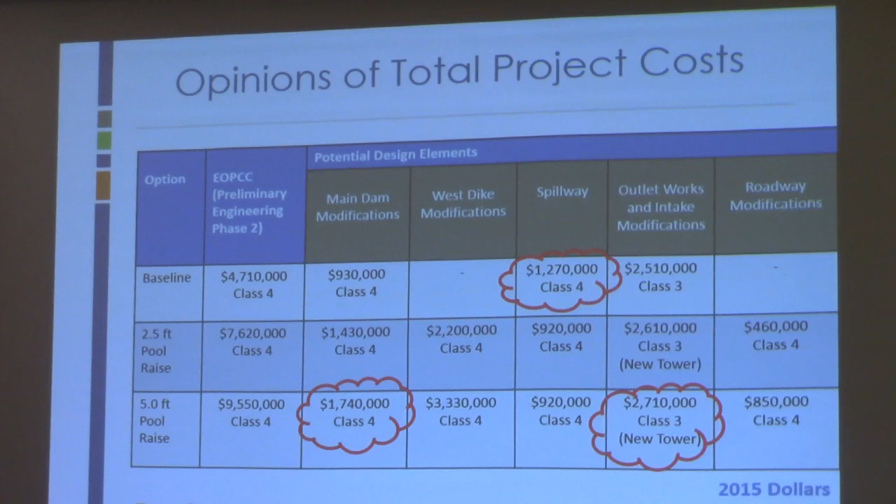Any other questions? I know this is a board meeting, but we have both the Ulster supervisor, who pays a lot of our bills, and Bill McKenna, the Woodstock supervisor. I know we don't want to open it generally for questions for everybody, but we want to let them ask any questions. Sure, do they have any questions? What is your estimated period of construction, and are there any potential service disruptions?

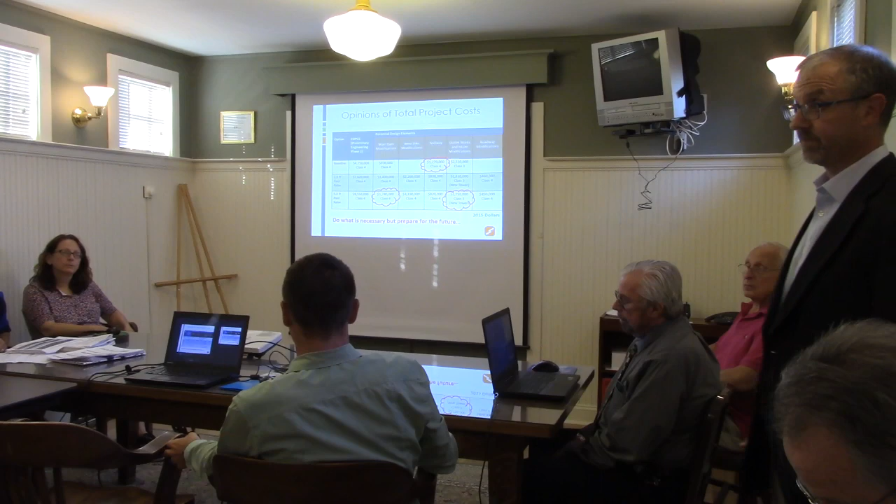So I can answer: it's a year, pretty much 2019 is where the work will be done. The way that we are planning to do it, there wouldn't be any service disruptions. The reservoir would be maintained in service. There would be careful control of water quality as there needs to be. There's really no other source.

There is another source, but not for all of it. No, 1 million gallons a day for the town. We can get off your system. I guess I was speaking from

Kingston's point of view. I think the biggest challenge during construction is turbidity loading for our filters, and that's the reason we did the plant work first. We're hoping that with cofferdams and other construction techniques we won't have that, but if we did, we certainly would chat with you about coming off for that period of time during the construction and helping us in that sense.

I don't know where your service connection is, but we could do some brief shutdowns at Cooper Lake and survive out of Binnewater storage for a day or two, depending. And that's when the town augments us quite nicely. When we had that transmission main failure, the town was able to give us over 4 days about 3.5 million gallons. And when we brought the reservoir back online, we had less than 3.5 million gallons in the reservoir.

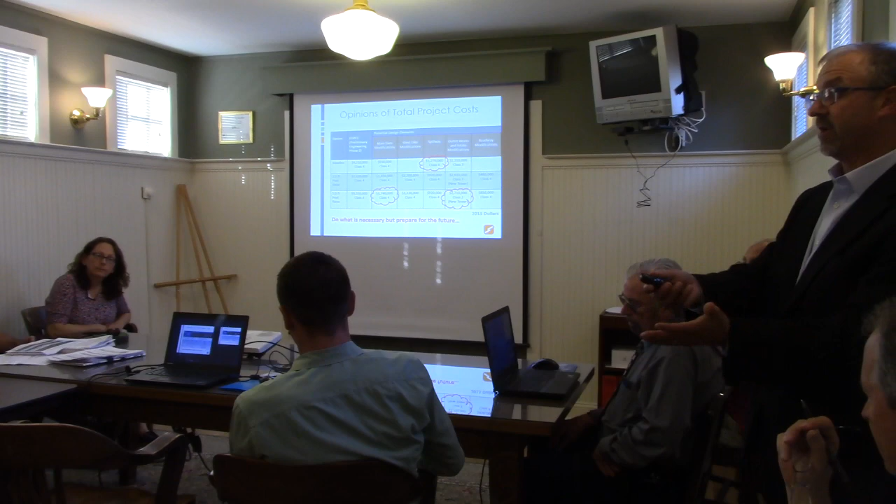So they're able to give us combined about 1 million gallons a day of our 4 million, so it would stretch any water to make that work. I think that's kind of one of those examples of a detail that affects the cost of the project. If the contractor has to come in and not tolerate a single outage, he's got to figure out how to do it, and it's going to cost money. If the town or the water department can offer creative solutions to borrow water, for example, for periods of time to extend the time they're working in the reservoir, then it can be done more cost effectively. So it's just an example, we don't know until we're there, but those are the types of details that get resolved along the way. We can only speculate now.

So I knew you had a question. That's Bill McKenna, supervisor of the town of Woodstock. First off, I'll say to the board, the town of Woodstock does have a vested interest in Cooper Lake, that should that thing ever happen, there is some understanding about tying in. So we're not in opposition to any of this. This makes a lot of sense with global warming, global changing, more intense, less frequent rainfalls - the more water you can capture, the better. So we're not here to protest this.

Good to hear. The one question I did have earlier, when I saw about raising that road 5 to 6 feet, and I could be wrong, I haven't shot it with the transit, but it seems to me that at least one or maybe two of those houses would then be below the road grade.

So that would be something we want to take a good hard look at. And I'm sure you will. I'm sitting in front of another property owner who owns a lot of lakefront property, so if the water went up, I'm guessing she's going to lose a little property as well. I'm sure she'll have some concerns.